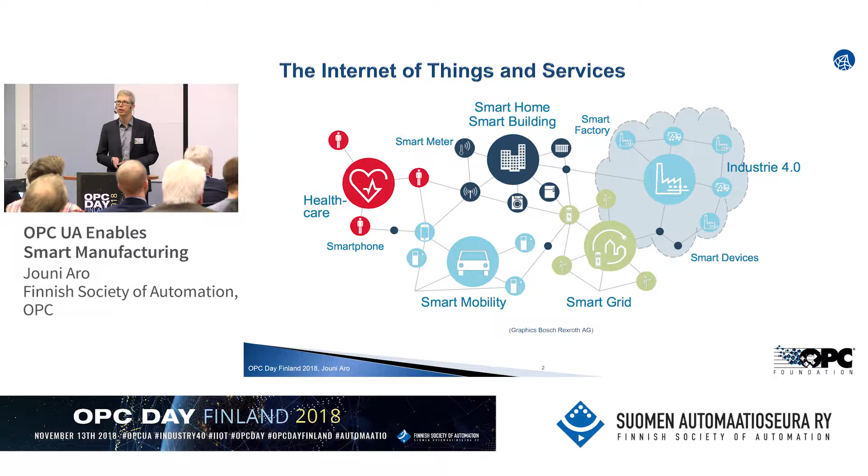There are a lot of new global trends for new manufacturing requirements. We need more individualized products, faster go-through times, different customer-driven products, and more flexibility in general for production compared to the traditional world. And that creates new demand for new ways to manufacture.

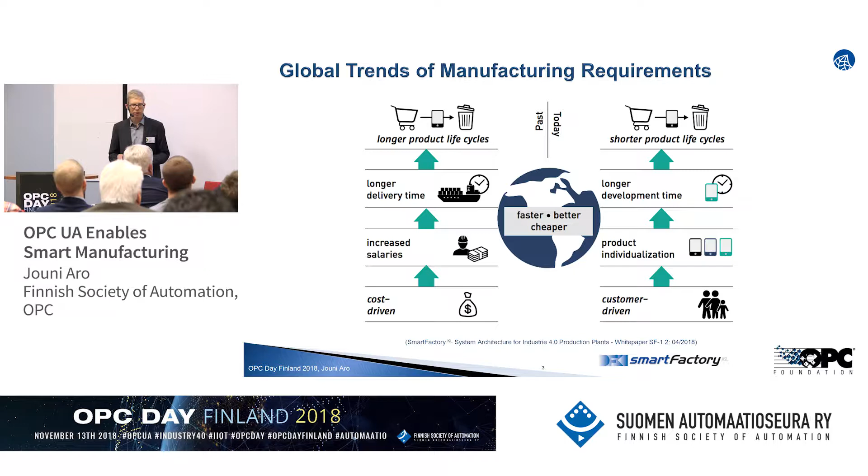So there are different target criteria for the smart factory. This is coming from the German Smart Factory KL studies, an initiative really looking at future ways to arrange manufacturing as smart factories. And we have a pointer here.

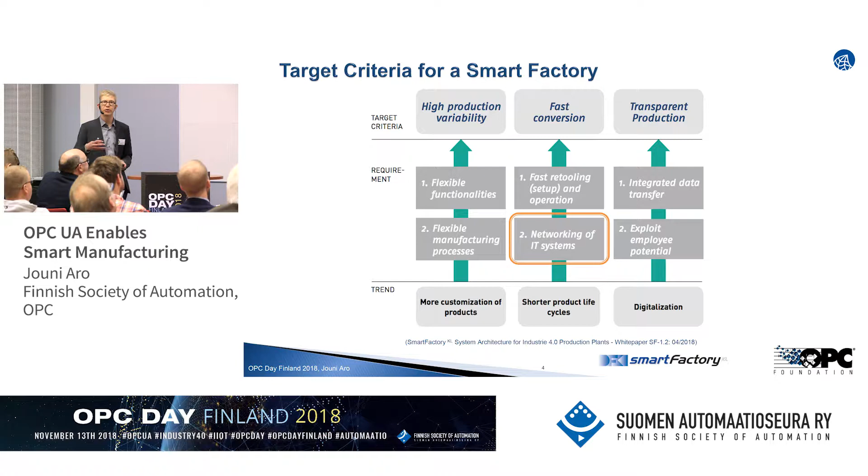There are different needs, especially more flexibility that's required. But in practice, what we're concentrating on is that the networking of IT systems needs to get more advanced all the time. On the other hand, we can compare today's production systems with the past, like Industry 3.0, which was very hardware-based, with this traditional automation pyramid that you're all well aware of.

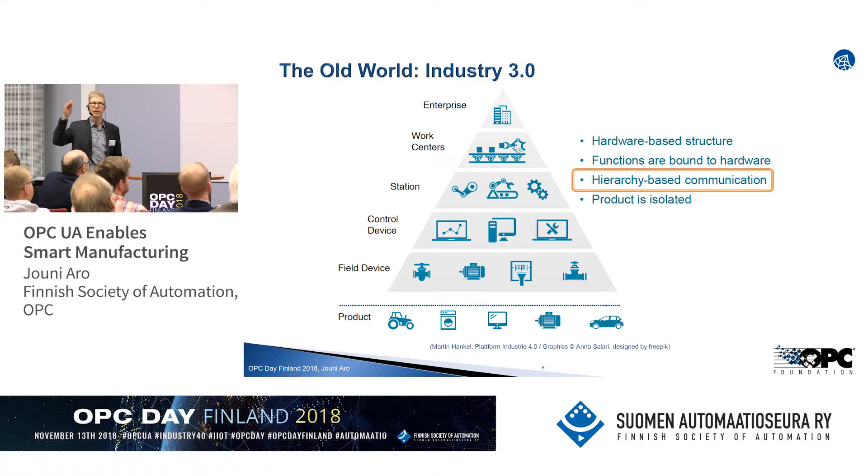The main difference is that the product is separated from production, but it's still very hierarchical-based communication, with different levels in the communication. When we move to Industry 4.0, the picture becomes scattered, fragmented. We have smart products that can be connected to production, but different parts of production will not be arranged hierarchically anymore. Everything will be connected to everything, bringing more flexibility to the system, and communication among all participants is key to making this happen.

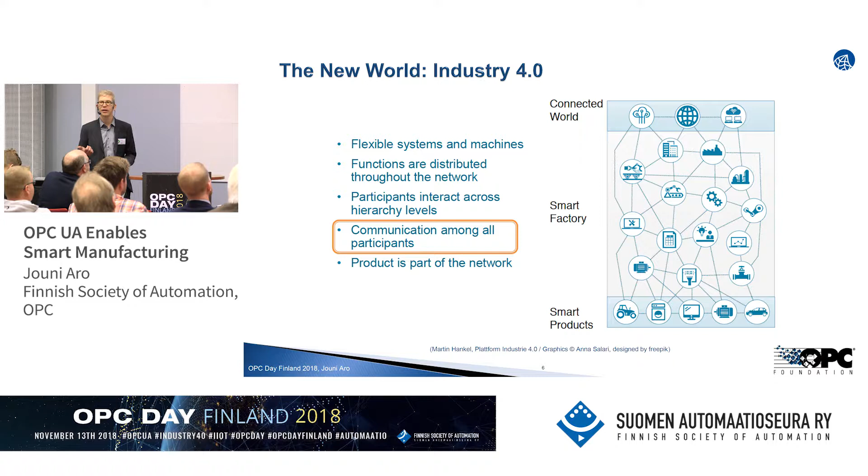Manufacturers, especially in Germany, car manufacturers are looking for new ways to arrange the production line. The traditional assembly line will be going out because it's very rigid, designed for making one product very efficiently, but not flexible if you need to change the product or make more individualized products going through different paths in the production line. There are ways to use cellular production, where the product itself can take different routes through the production system, with different vehicles or even drones taking parts between production cells.

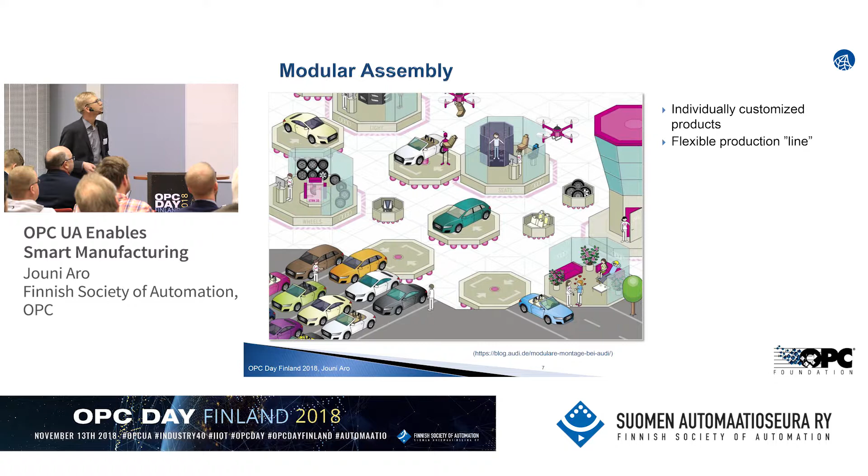KUKA Robotics is designing cellular production, or matrix production, with different production cells consisting of robots, for example sets of 4 robots that can assemble different parts together, and AGVs, automated guided vehicles, that transport the product or parts between these cells. Each cell can be reconfigured for different assembly tasks or different parts of production. This is a very dynamic process, and active communication between all the components is important.

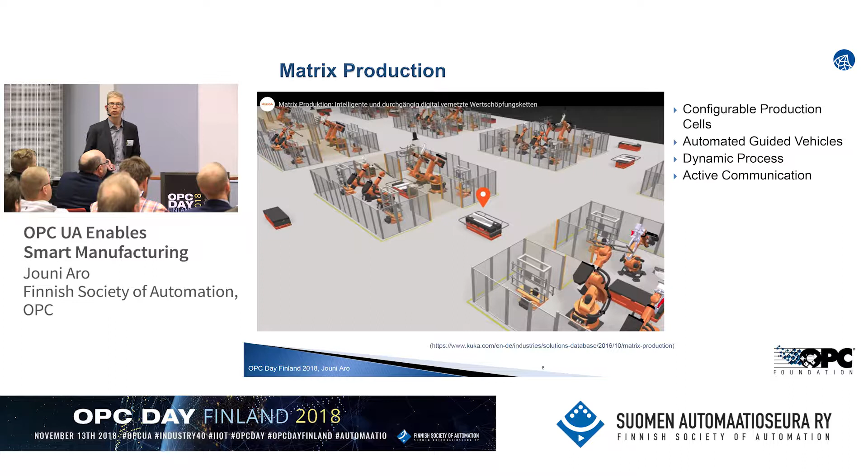These components act as individual agents working in the line, talking with each other and exchanging production orders. One key thing here is that logistics is separated from production. There's a warehouse, the AGV pool and tool store, and production happens on the shop floor, with production cells arranged in a matrix.

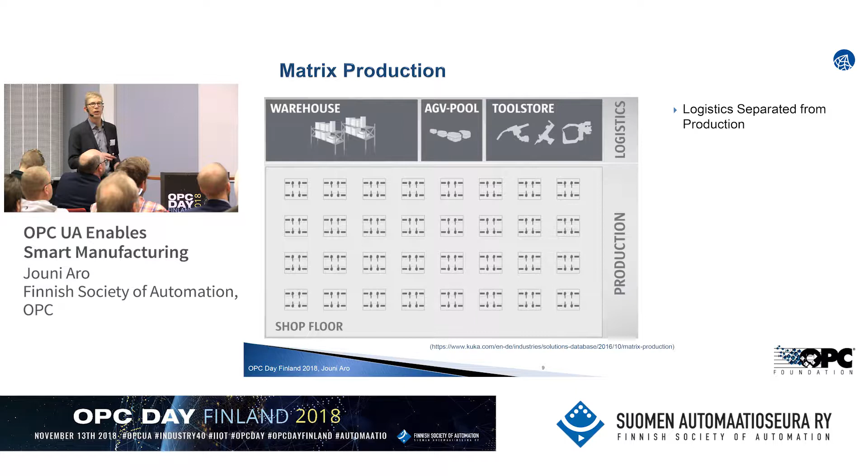What's really good about this is that it's really flexible for size—you can just add more production cells if you need more capacity. It's also reconfigurable: if one of the cells goes out of order, you can just reroute the parts through another cell on the shop floor.

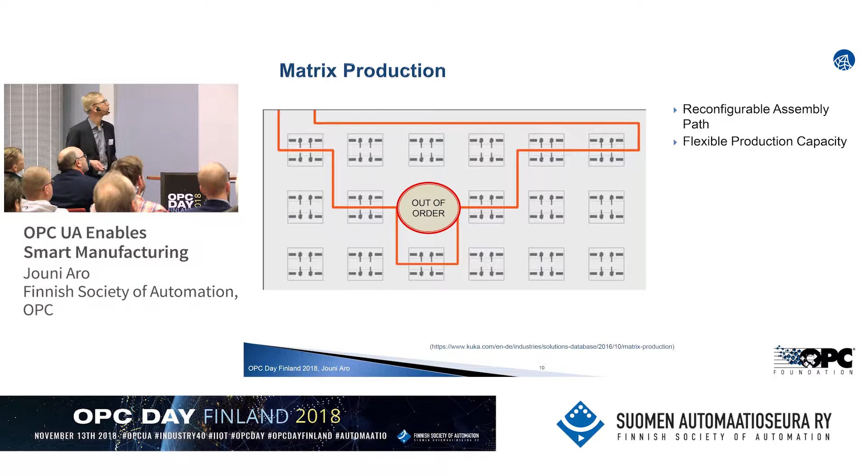In Germany we have this Industry 4.0 reference architecture model that Mika already explained, which now draws out a complete picture of arranging future manufacturing from different perspectives. There are 3 dimensions: life cycle management, the hierarchical levels of production, and the communication layers, starting from real assets and going toward virtual communication, information, and functional parts—more like the software part of the system.

The main thing here is that the model gathers together different standards that already exist. It's not creating that many new standards, but gathering existing ones, with the idea that if we want to do things in a standardized way, we just need to use these standards—so everybody working on this concept is talking with the same terms and the same concepts.

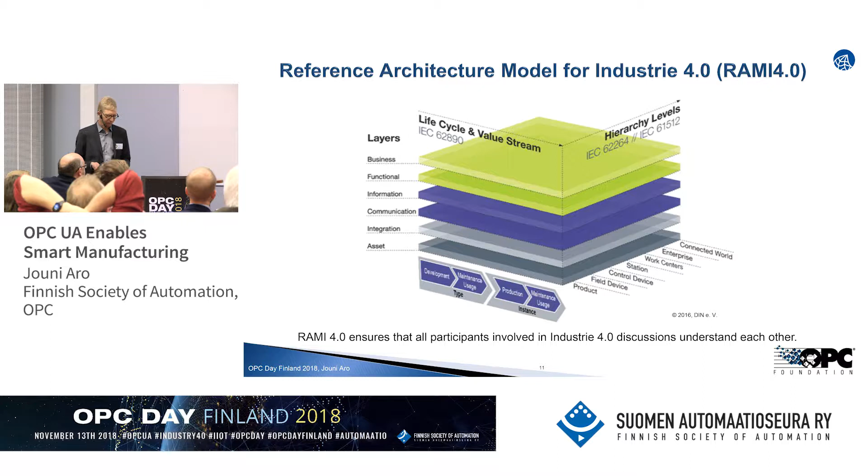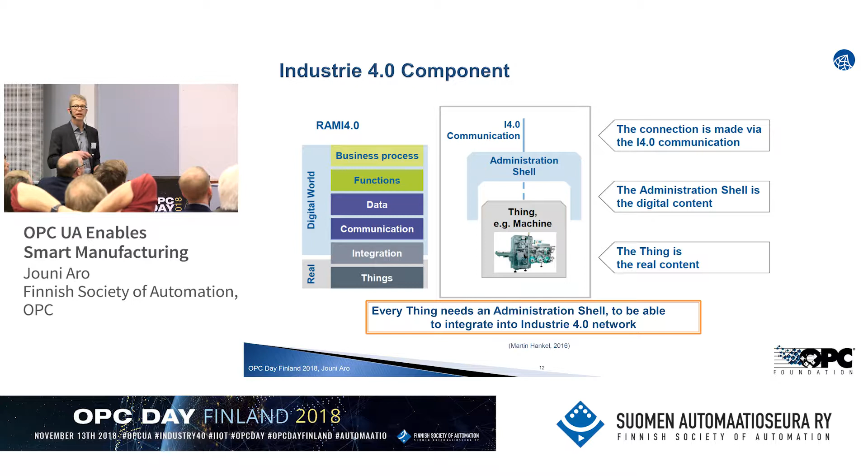If we look at this separation between the real world and the digital world, the idea is to bring a digital component called the administration shell to cover all physical things. Then we can communicate with everything, and connect all the parts in the Industry 4.0 communication.

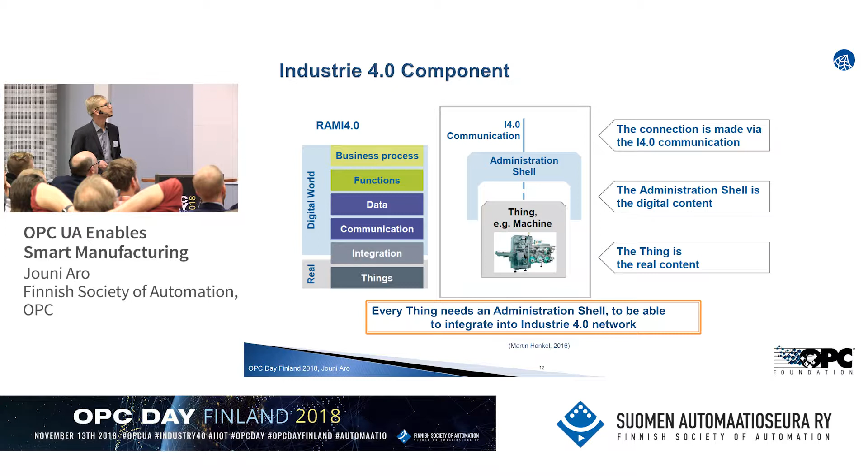Everything needs an administration shell to be able to communicate in this Industry 4.0 network. There's a lot of things that need to be considered, very basic things like identification, semantics, and communication, so this can really happen in practice. It's really low-level stuff, and communication is a key part here. Only on top of this, when it's standardized, can we talk about standardized functionality and so on.

An important thing is that security needs to be taken care of on all layers of this system, and we need worldwide standards to make this really happen in practice. That's what Industry 4.0 is trying to put out.

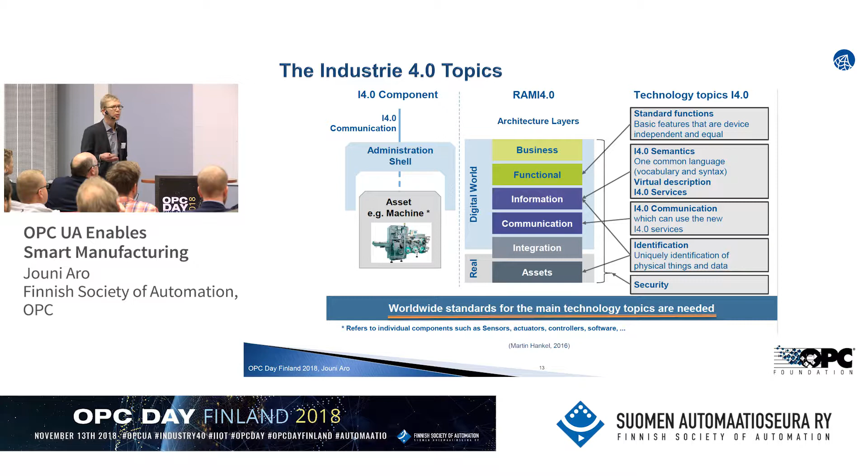Here comes the OPC Foundation to the play, and brings OPC UA. That is an interoperable communication standard, but it's also bringing data modeling capabilities, so we can build on top of the communication, semantic modeling, and the information, which is even more important. I would like to see the communication problem solved already, and rather talk about what the information is, and standardize that.

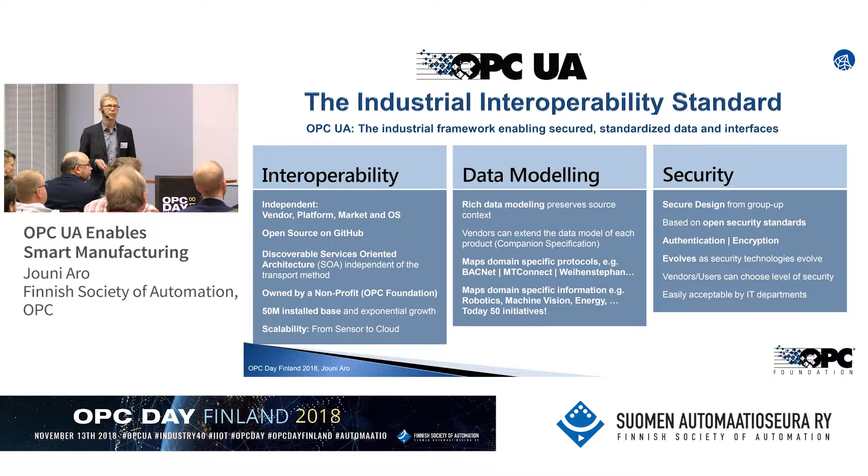Security is also brought with OPC UA, built into the communication, and we would like to see that problem solved too. It's there, we don't need to know too much about it because it just is there and we don't need to care. So the data modeling would be the main thing we want to concentrate on after this. Andreas Faath will be talking more about the modeling stuff later on. That's something the OPC Foundation is trying to establish, so we can concentrate on bringing this all standardized as well.

The OPC Foundation is an international organization comprised of member organizations like Valmet and other key players. All the major automation vendors are part of that. Today the number is over 600 already, and most of that is in Europe, or at least around half of the members are from Europe.

The OPC Foundation is providing different deliverables available from GitHub, the basic stack components that are the low-level communication components. On top of that, we have different products in the market that help create really good level products in practice. This whole technology has already been developed for over 10 years, so it's really on a high level today.

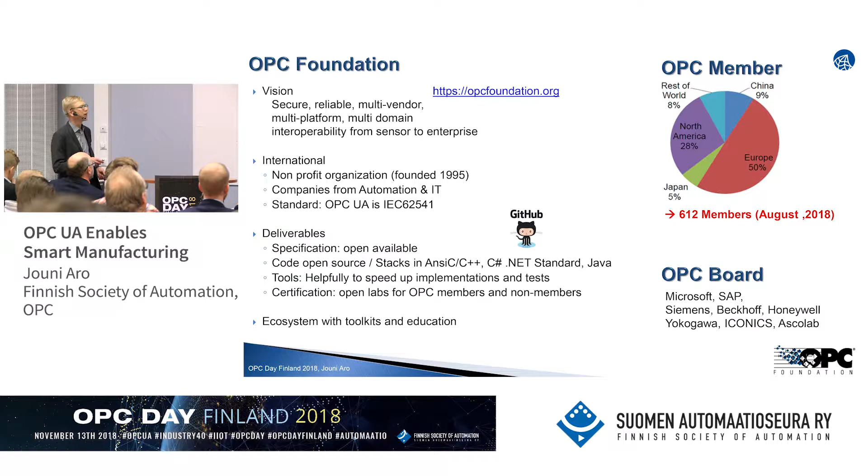There are certification labs that ensure the products are interoperable with each other. The OPC Foundation wants to emphasize that products need to go through certification, so end users can really trust that they function as expected. The foundation is creating an ecosystem with toolkits and education around it, so different companies are arranging workshops and providing tools to make this easy. Someone describes the whole technology as very complex, but with good tools that already implement the details, the idea is that for the end user it should be easy to use and easy to configure.

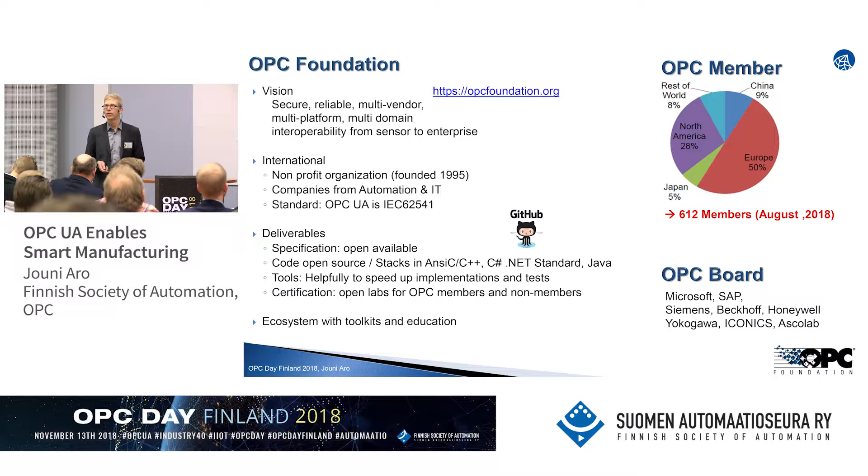The OPC Foundation has just announced a new president. Stefan Hoppe took over from Tom Burke, who was president for over the first 20 years and did a good job evangelizing about the technology, making a lot of connections all over the world. He's still working on the board, going around the world talking about it.

But Stefan has already been active for several years. He started arranging the OPC Day Europe around 2011. We had the first day, and with Stefan we've been working together to really take OPC further in the world.

The main thing now with the modeling stuff especially is happening through collaborations, and that's where these guys, Tom Burke and Stefan, play a key role. They're establishing collaborations with different standardization organizations and other organizations in the market. The key one today is VDMA, and Andreas Faath from VDMA will talk more about that cooperation in his presentation. They are now taking over organizing and coordinating the collaboration work, so that the different groups bringing new information models also work together to ensure those models are not too separate from each other.

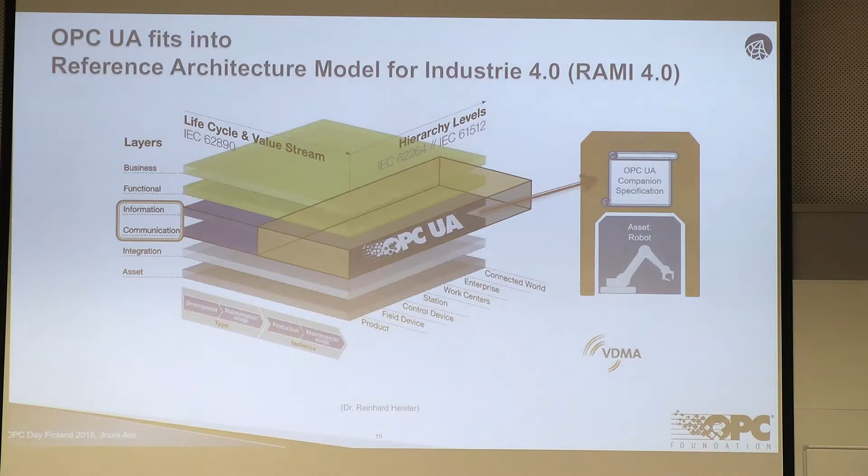Also, this Industry 4.0 communication is OPC UA in practice. That's already been defined - every Industry 4.0 component must be able to do OPC UA communication.

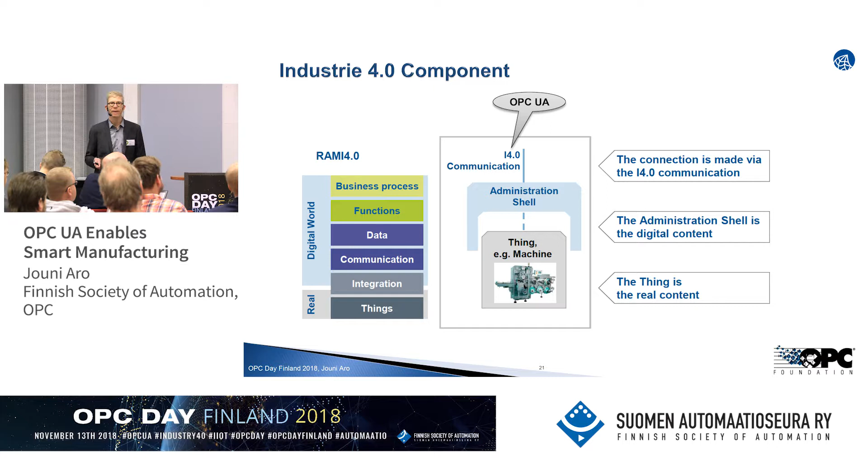Regarding security, OPC UA has its own security implementation, and the first question is always, is it reliable? The good thing is that in Germany, they already evaluated it - the German governmental institute, the BSI, did a security analysis a couple of years ago, and the results said that if you use security, then you have a secure communication. OPC UA still leaves it optional - when you configure the connections, you can leave the security out, or if you go really low-level devices, the security might be too heavy to implement on a sensor level, for example, then security is optional. But of course, we always recommend that you use the security, and with it, you can really go out of the production networks to the higher level office networks and even to the internet. If you configure it right, it's secure.

Okay, and finally, I'm showing you a use case of SAP, who has also been implementing OPC UA for several years already. They have a component called plant connectivity - that's an OPC UA component, enabling bringing all the manufacturing information to their ERP system.

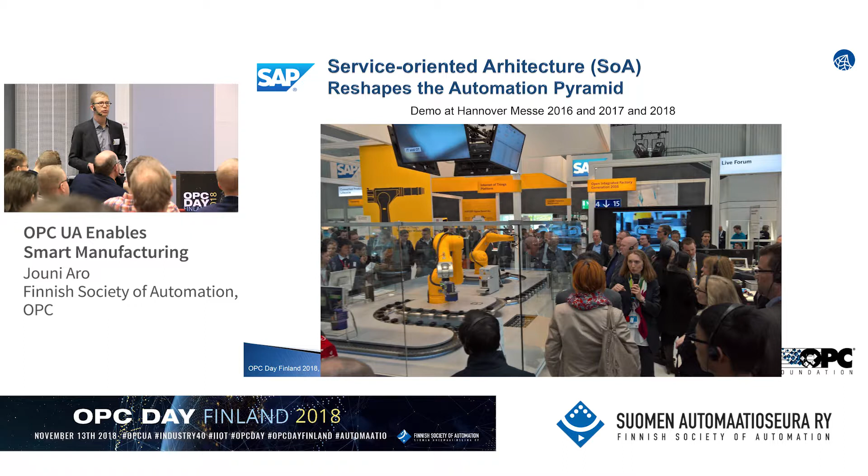This has been demonstrated at the Hannover trade shows, and in practice, the idea is that there are different components, different assets, transport systems, robots, cameras, printers, whatever, that are creating the production line. Then there's this SAP plant connectivity tool that's connected to the SAP data center. All of these are both OPC UA clients and servers.

OPC UA is a client-server communication protocol, meaning there's always a kind of passive component, the server, that's ready to serve whenever the client component makes a request to do something - request information or request an operation from the other system. With this, any component here can make requests to each other.

They can ask even higher level tasks, like do the job, and when the other part is ready, it can inform that the job is done. They're only using OPC UA method calls - they don't need any handshake mechanism that you need in a traditional communication if you try to do the connection with just variables that you traditionally do with PLCs, for example. That's the clever part here. And these are all hardware components, so you don't need any PCs in between or anything like that. That's been traditionally a limitation.

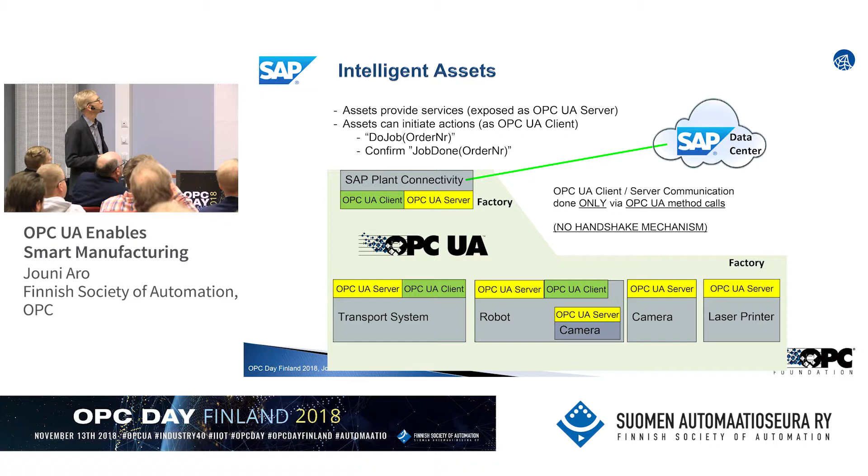So, for example, we have a smart robot which has a camera as part of it, but the plant connectivity is just making an order to the robot. It doesn't know the robot has a different component, the camera, but the robot is then calling the camera to take a picture and analyze it. When the job is done, the robot is just sending a message back to the high-level system that I'm ready.

And with this kind of communications, the whole production ordering system can be very flexible, dynamic. Each component can ask other components to do different parts of the production whenever they need it, and they're calling it like an agent-based production - not monitoring, but production control.

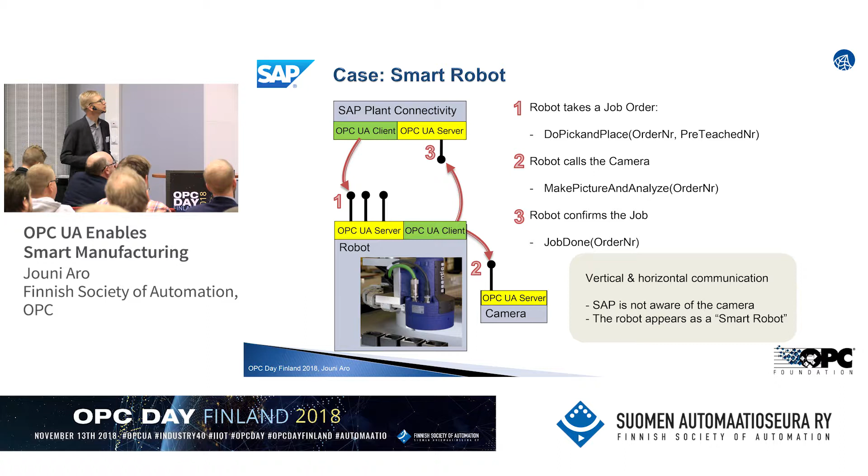Okay, so I mentioned that OPC UA is a client-server communication that comes from the past. The whole development of OPC actually already started in the 1990s. We were talking about OPC Classic back then - that was a really well-established communication protocol. We called it OLE for Process Control - that's where OPC comes from. OLE was the old Microsoft technology inside the Windows operating system. Nobody really wants to talk about it anymore, so please be quiet, yes.

But it managed to establish a very good set of separate communication interfaces for transporting current data, under this data access protocol, meaning how do we exchange measurement data between two systems - the current status, for example the current temperature. Another set was alarms and events, which defines how you monitor different system alarms. For example, if the temperature goes out of limits too high, we get an alarm - that's the only thing we are interested in. We don't want to monitor all the samples of the temperature all the time, so we can just monitor those events.

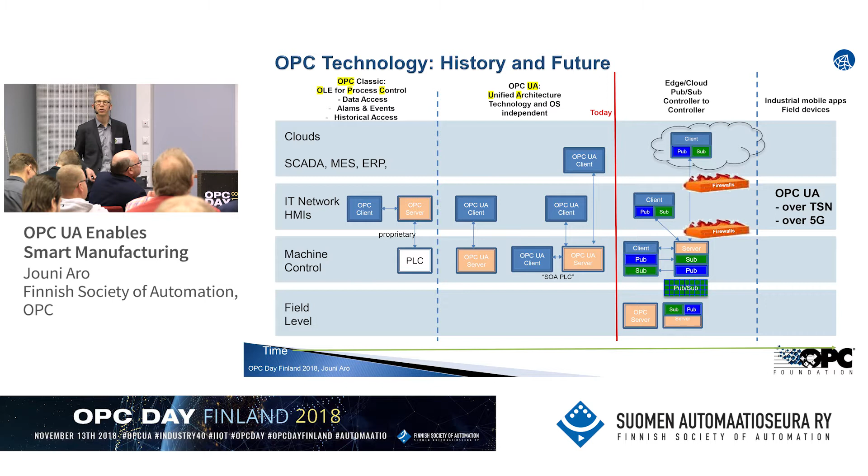So today, most of the talk is about TSN, and even now we are talking about OPC UA going over 5G, which hasn't been established yet. Both of these are coming technologies, and OPC UA will be taking advantage of both of them to make it real time in practice. Matthias will be talking about the PubSub technology more in his presentation.

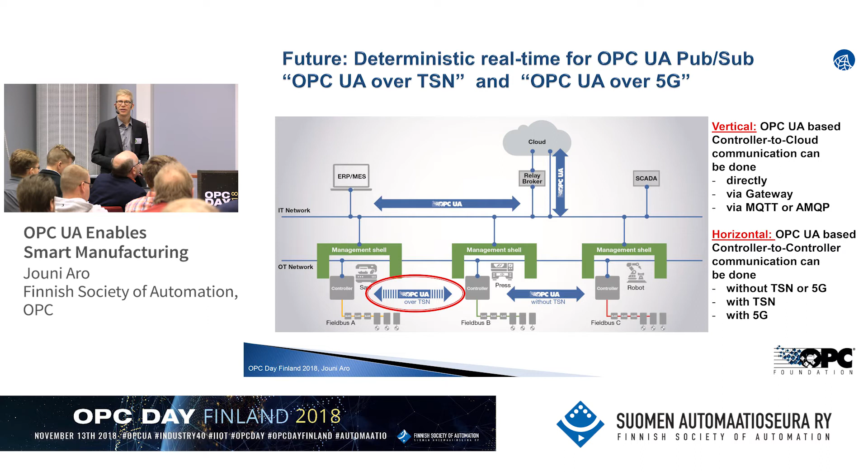So if you remember the beginning of my talk, I was showing these visions of KUKA Robotics, that they are actually building these systems, the matrix production. All these components can communicate real time with each other over OPC UA, and they can exchange semantic information with each other. It can become really flexible, like we see in this SAP example. When every component can communicate OPC UA, they can be really clever, and we can really have smart manufacturing in future through this.